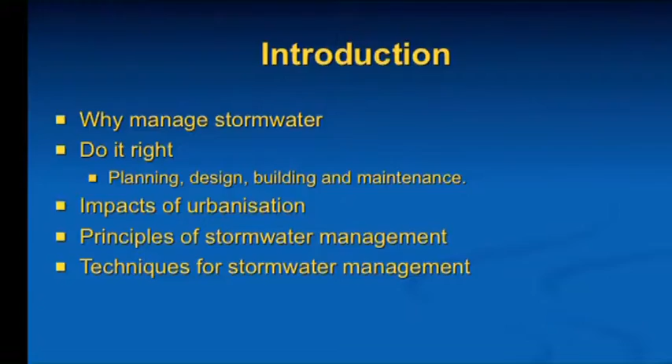Why we might want to manage stormwater, very briefly. Then a little bit about doing it right: planning, design, building and maintenance of stormwater drainage systems, stormwater management systems. In order to know what we're trying to achieve, we have to know what problems we're trying to address. So I'll talk a little bit about the impacts of urbanization, and then principles of stormwater management, and finally, what's probably of most interest to everybody, the techniques for managing stormwater. Some of them, not all of them by any means.

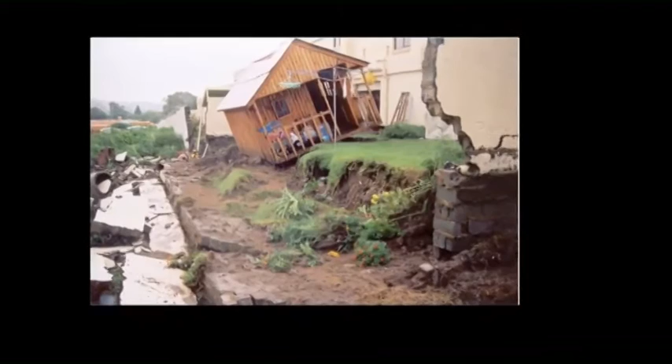All right, why might we want to manage stormwater? The obvious reasons are we want to avoid this sort of situation where the water gets out of hand and washes people's gardens and things away. This is an eroded donga just downstream of Vorna Valley. That's the Vorna Valley Spruit. It used to be a lovely rural catchment of Midrand. It's now an urban catchment of Midrand. Hence, the wetland that was up at this level no longer exists. And that's a bridge in the south of Johannesburg.

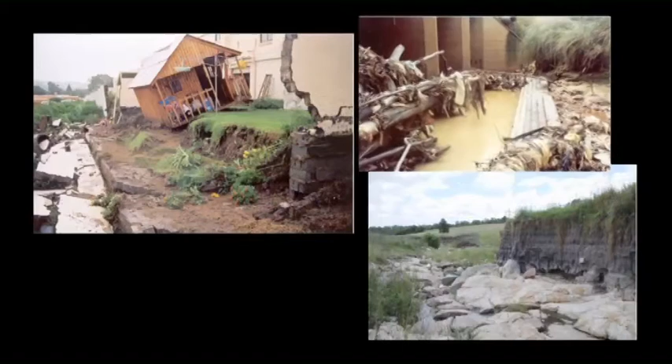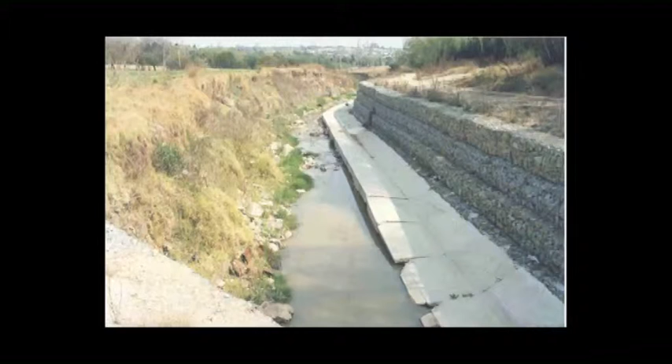Here, somebody's attempt at fixing a donga. What do you do when you have dongas to fix? You stick gabions in them. But in this instance, they stuck gabions down the one side, forgot that rivers erode on both banks, and also tried to go a bit deeper. So we have a gabion wall, a lovely little concrete channel, and the stream flows down the bottom of it. So, how was this fixed?

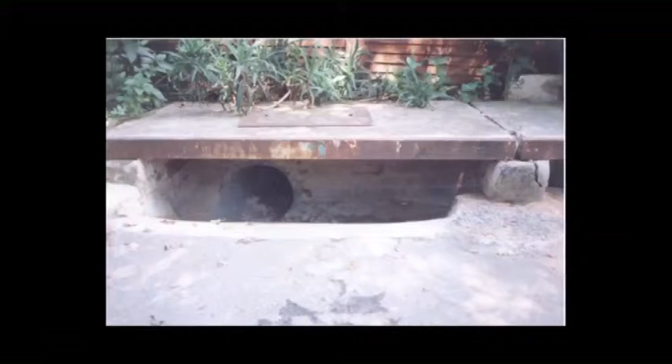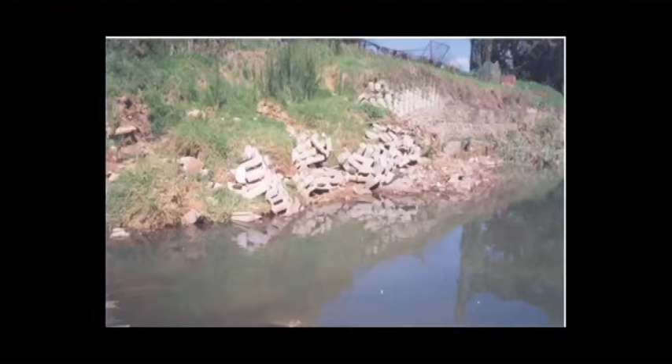And then this is a technical thing. Why do you think the person who designed this fancy outlet with this tiny little pipe at the bottom really and truly believed that it had to have such a big mouth? I'm not sure, but do it right. And if you're going to build it, also build it right and try to make sure that it stays there. You really don't want this to happen. Down on the Braamfontein Spruit below Pirates, that was a Loffelstein wall that didn't have a proper foundation, so the Loffelsteins are now going to Hartbeespoort Dam slowly.

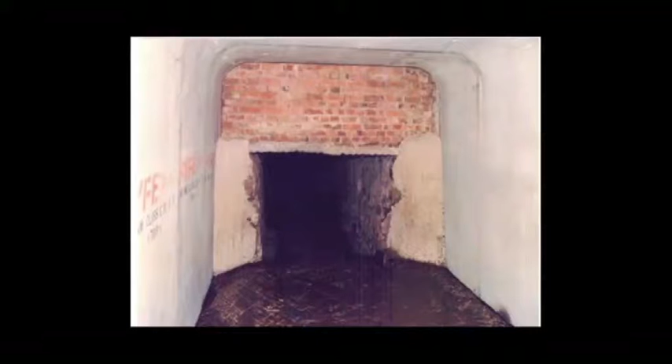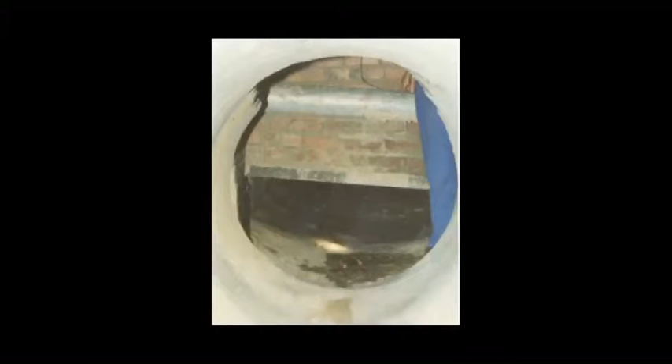This view is looking downstream in a culvert. I'll talk about where you start stormwater management and stormwater drainage facilities, but you don't actually build a great big one and then hope that the water is going to find its way into a little culvert at the bottom. It doesn't work too well. This is looking downstream in a stormwater pipe where somebody got their planning wrong, or maybe they didn't. They just came afterwards and decided they needed an electrical conduit through the stormwater drain. So we have this clean, great stormwater pipe and a box. So that pipe doesn't work too well either.

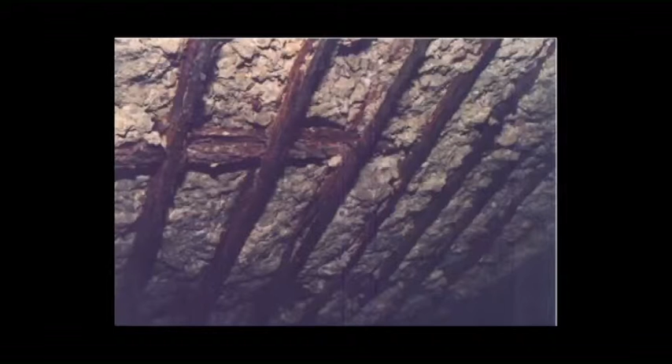If you're going to canalize rivers, you really do need to do something about maintaining them. So scour holes are not great because they end up in bank failure, and that costs maintenance. And this finally, this is quite an interesting problem.

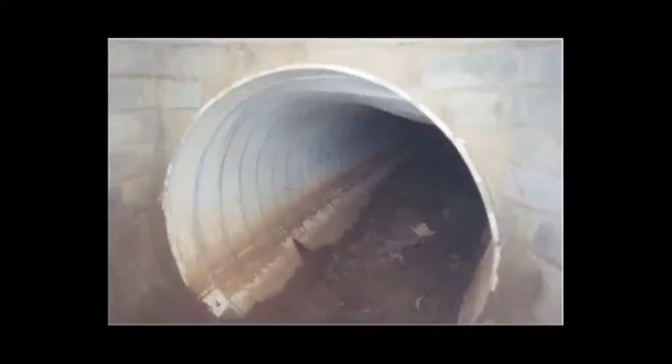That is a thin-walled plastic pipe. It's a structural walled plastic pipe. It comes in a roll, and as you want to make a pipe, you actually roll the thing out and it clips together, the little edge like that, and you end up turning your plastic strip into a pipe. But it's got an effective structural thickness of about 8 millimeters of plastic.

Now, somebody took a 900 pipe and they buried it under 2 meters of soil, and they thought because somebody told them something, it was going to work. When I say do it right, it doesn't only mean build it right. What I mean is also manage it correctly. What happened here, the consulting engineer had designed a concrete pipe.

Concrete pipes are expensive. The contractor went along to the developer and said, I've got a much cheaper plan. I can do it with this cheap plastic pipe. And the developer said, well, if it works, of course, let's do it. So the consulting engineer was overridden. And this plastic pipe, I don't know whether you can see the top there. It's just quietly collapsing into itself.

Consulting engineer was the first line of attack. You let us build this thing. Guys, everybody needs to be sensible about what they're doing. So this kind of mistake can be quite embarrassing. But what are we trying to achieve? We're trying to manage the impacts of urbanization on stormwater, the effects that they have on the catchment.

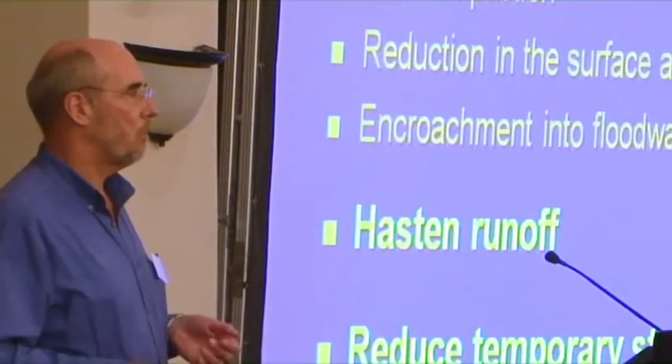So because the system is more efficient, it responds to shorter, more intense storms, and you get this sort of vicious circle. The more intense storms you have to deal with, the more efficient systems you have to build. And so your systems are perpetually becoming undersized. Similarly, then we have to canalize our water courses because we've got increased runoff and the water courses are being damaged. Again, what it does is it makes the system that much more efficient.

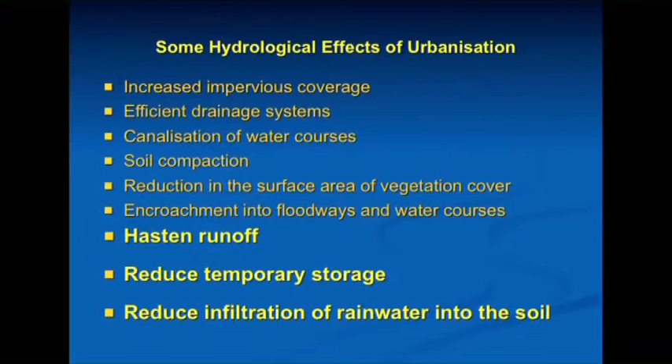And then the hard one, soil compaction. We say, but we've got open spaces, we've got gardens, we've allowed for these median islands in roads. And why aren't they working? Why aren't they absorbing the water? It's actually quite simple. A natural soil is not a homogeneous mass. It's got voids, it's got macropores, which were animal burrows, which were old root channels and things like that.

Not root canals, that's a bit painful.

Yeah. And those soils have an amazing capacity to absorb water. But when we build anything, the first thing we do generally is we go and we clear the site and we compact this, and then we go and plant something afterwards. That changes the structure of the soil and it reduces its permeability by probably a half, probably even more than that. So just providing open spaces within our developments doesn't necessarily mean that the soil has the capacity to absorb the water. You need to help that.

Reduction in the surface area of vegetation cover. Okay, reduction in the surface area of vegetation cover. Leaves take an enormous amount of rainfall to wet them. By taking the vegetation out, you increase the runoff.

Encroachment onto the floodways, of course, we're taking the storage out of the system. What do these all do? They hasten the runoff, they reduce temporary storage and they reduce the infiltration into the soil.

And then some quality effects of the urbanization. We increase the point and diffuse pollution sources. The failure of the wastewater drainage systems, we've all seen it. We've all seen the popped sewers all over the place. Poor and non-existent sanitary facilities.

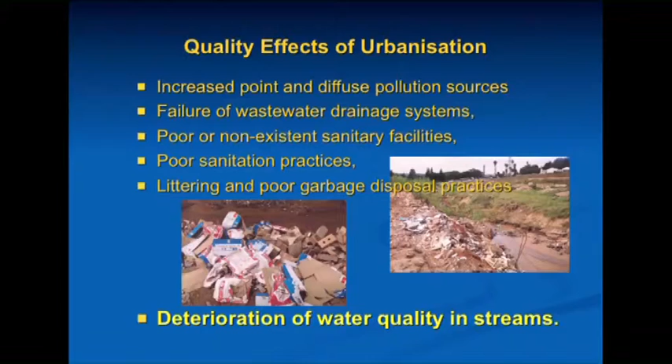Probably the grossest thing that I've seen in a long time is the sanitation system in Khayelitsha. They tried to build a vacuum sewer system, but for whatever reasons, it doesn't work. So the sanitation system there consists of paint tins and Checkers bags, plastic bags. In each one of the little shacks is a paint tin and a Checkers bag that gets used for the night. In the morning, the bag gets tied up and it gets tossed out with the garbage next to the skips. And of course, it gets picked up by the stormwater drainage and down it goes into the rivers.

Impacts of this: increased frequency of runoff. Why is frequency of runoff an issue? We know that we can have wetlands sitting on very steep slopes in rural catchments, 3%, 5%. I've seen wetlands sitting on a 10% or more slope on the side of the hill in Natal. The reason that they can exist is because surface runoff over those areas occurs very seldom, maybe once a year, maybe once in every couple of years. In between those events, the vegetation has time to reestablish. It might be damaged, there might be a bit of erosion, but in a year or two, the vegetation is reestablished.

What do we have when we have impervious surfaces and it rains? 2 millimeters of rain is all it takes to start runoff from a road. So every single time it rains, boom, the river gets hit. Hydrograph comes down, the vegetation hasn't a hope. So increased frequency of runoff is probably one of the worst, most insidious causes of damage in urban drainage systems.

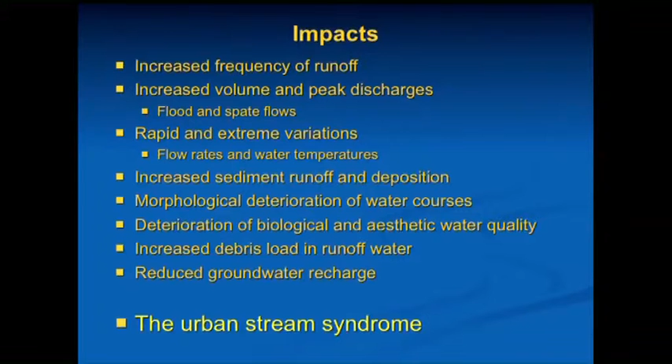Increased peak flood and increased volumes speak for themselves. Rapid and extreme variations have huge impact on the ecology of systems. Temperature variations in salmonid streams in particular, that's where it's been researched, but I'm sure we'll see temperature variations if our fish populations are ever researched. Increased sediment runoff and deposition. We heard yesterday that sediment runoff from construction sites is about 100 to 500 times more than from natural catchments. Deterioration of the biological and aesthetic quality of water, increased debris load in runoff water. We see that, and I showed you a picture of that. And of course, the reduction in groundwater recharge.

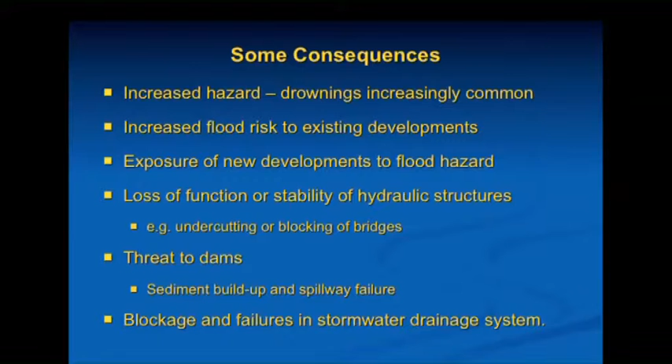All right, some consequences that we feel in society. There's an increased hazard. Every summer we hear of people who drown, mainly because of a lack of appreciation of the power of the water, a lack of appreciation of how quickly the water level can rise in a river. Increased flood hazards, exposure of new developments to flood hazard, loss of function and stability of hydraulic structures, threat to dams, blockage and failures, all of those things speak for themselves, so we won't go into them.

More consequences though. Loss of the recreational amenity of watercourses. People are not really interested in dangling their feet over the edge of a 3-meter high vertical sided donga, so they write them off. We see increased public health risks. Even where we create water bodies, people will come into contact with that water, and you can't really stop them. If you create a water body, somebody's going to swim in it. This is an urban lake in Soweto. I hate to think what's in that water, but the kids are quite happy playing in there. If we're going to create water bodies that people have access to, we have an obligation to make sure those people are safe in them.

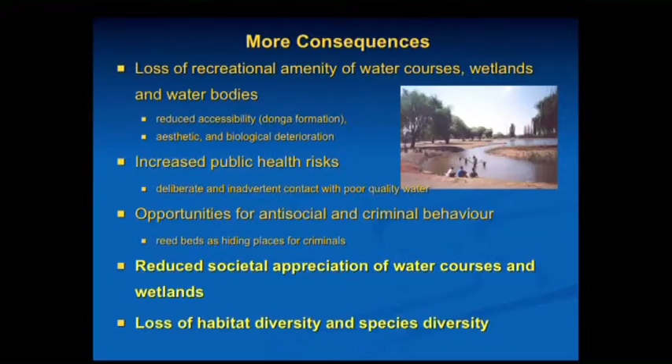And the result of that, of course, people lose an appreciation of the watercourses and water bodies, and if they lose an appreciation, they're no longer interested in maintaining them, and again, we have this vicious circle. If you can't maintain a stream that works, then why should we be interested in it? And if we're not interested in it, why should we pay you to try to maintain the stream in a state that works?

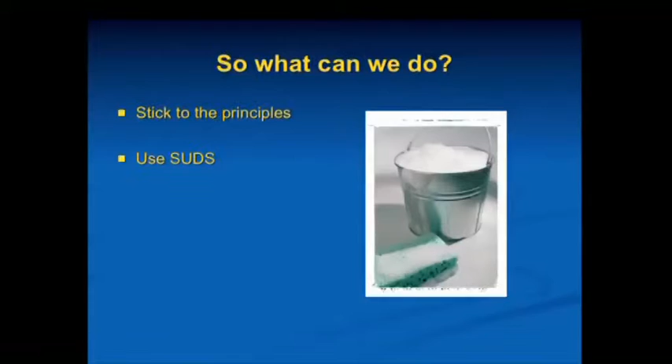So what do we do? We use SuDS, and we stick to the principles. I'd like to go through these quite quickly because some of them are quite important. Understand that drainage is a regional phenomenon. It doesn't respect political boundaries. It doesn't respect property boundaries. The only thing that water knows about is running downhill. Right?

Every urban drainage area has two systems, whether they were designed or not. We have a pipe system or some sort of little stormwater management system, and then we have the floodways. Water will find its way downhill; whether it has to go through somebody's lounge to do it, it will find its way downhill. Runoff routing is a space allocation problem. You need to allocate space to water.

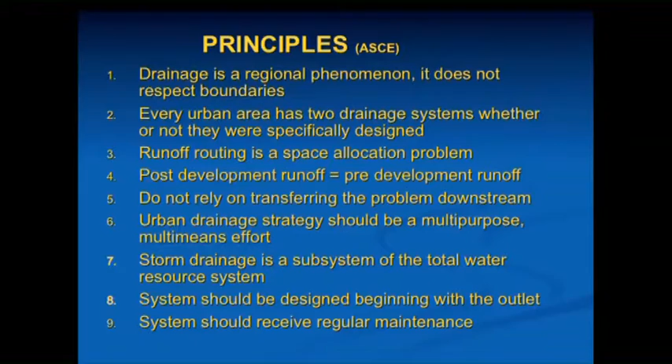Water has a volume. You can't compress it. You can't do anything with it. You've got to let it flow down the hill. Right. And don't rely on transferring the problem downstream. It was the old engineering way of doing things. Put it in a pipe, get it to the river as fast as possible. It'll go away. So what do we do?

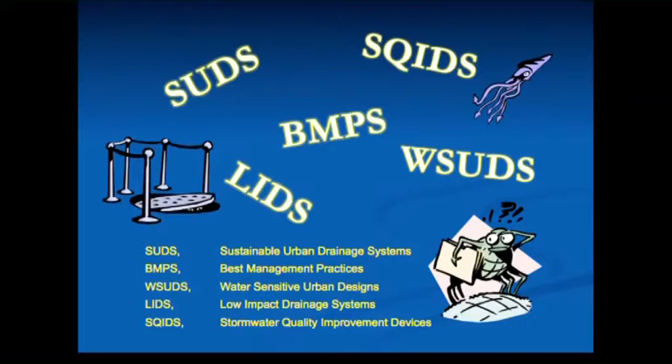So what is the purpose of a SQID? Really, all we're trying to do is recreate the natural processes. Infiltration: we're trying to give the water opportunities to infiltrate into the soil, and that reduces the volume of runoff, and it reduces the peak discharges as well. We're trying to give the water opportunities to evaporate, so we're trying to recreate evapotranspiration areas, planted areas and things. We want to store the water, so we create storage, detention facilities, retention facilities, and that reduces the peak discharge. It can, in certain instances, reduce the volume of runoff as well.

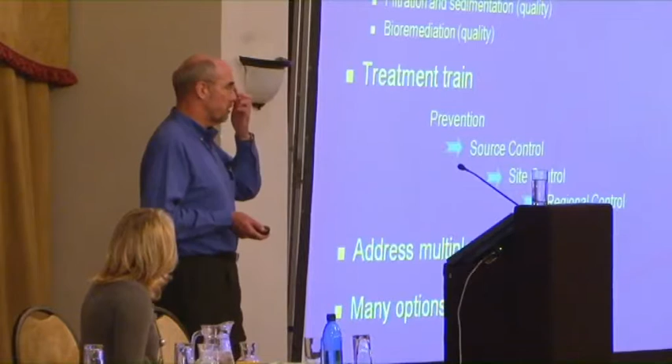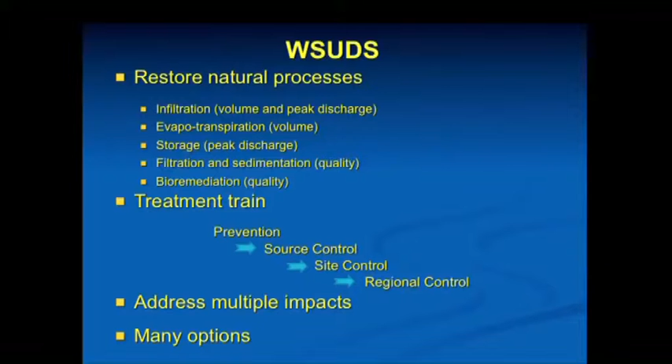We're looking to improve the water quality. So we want to trap some of the sediment. We might want to filter out some of the finer material as well, and we want to expose the water to bacterial activity and plant activity to take out some of the nutrients and possibly some of the heavy metals as well. So we have bioremediation facilities, and they work as a treatment train.

First of all, let's try to prevent the runoff. So let's try to reduce soil compaction in our open areas, and let's try to have as many open areas disconnected from the drainage system as possible. That prevents runoff. Then source control. Let's try to store the water on the roofs of buildings if at all possible. The roof of a building is an amazing storage opportunity.

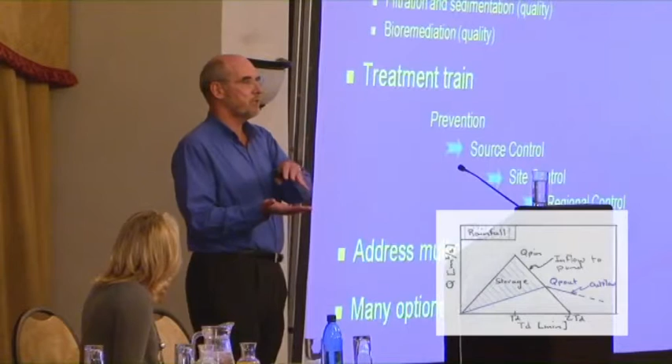I told you I've got another number for you. The normal structural design load for an accessible roof is 2 kilonewtons per square meter, which corresponds to 0.2 of a meter of water. The 24-hour, 50-year rainfall over most of this country is 0.15 of a meter of water. So if you store the water on the roof of your building, you can store the whole rainfall for 24 hours that would occur once in 50 years. We ignore that, but it's there.

If we can't control the runoff at source, we try to control the runoff on the site. And if we can't control it on the site, then some cities maybe have regional stormwater runoff control facilities. The idea is to address multiple impacts in a single facility. So if you can address quality, runoff volume, and peak flow all in the same facility, that's great. And of course, there are very many options, ways of doing this.

Stick to the standards first and foremost. There are standards for stormwater management, and you need to stick to those. Engineers will tell you you can't move away. We've all heard that. Engineers are the boogie people. First of all, the safety standard.

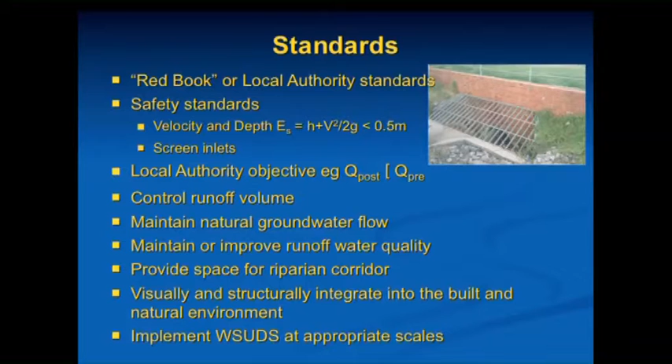Be aware of the power of flowing water. Water flowing at 3 meters a second, now that's fast, it's sort of a jogging pace, has a wave height of 0.5 meter. So if you have a stream of water which is flowing ankle deep, and it can easily be flowing at ankle deep, and it's flowing at 3 meters a second, when you step in it, the wave hits you on your hip. And if it hits you on your hip, you're probably going to roll over, fall over, and then you will roll down the water course.

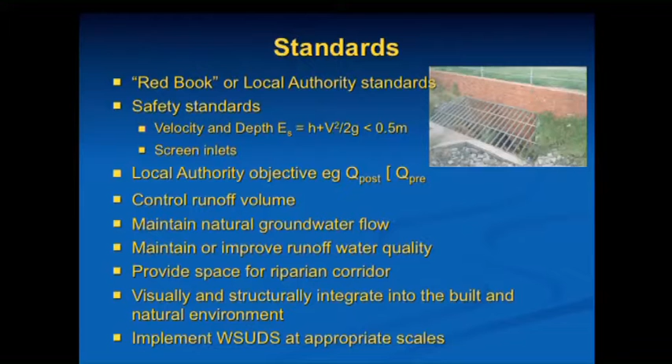Other standards, local authority objectives, try to keep the post-development peak discharge equal to the pre-development peak discharge. That's what the city of Johannesburg's standard is. The city of Cape Town is going a step further and saying, not only do we keep the peak discharge the same, but we also try to keep the post-development quality the same as the pre-development quality. Storage: Q in is equal to Q out plus change of storage. That's the equation I was going to give you.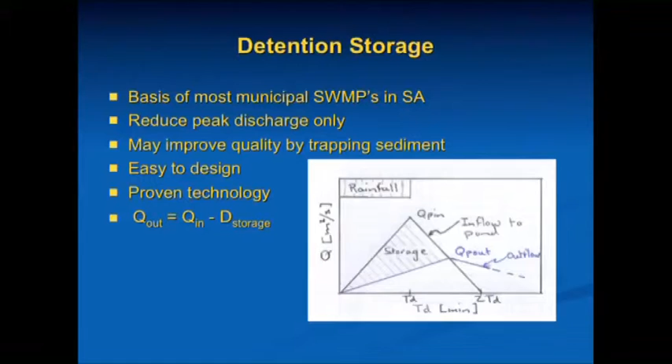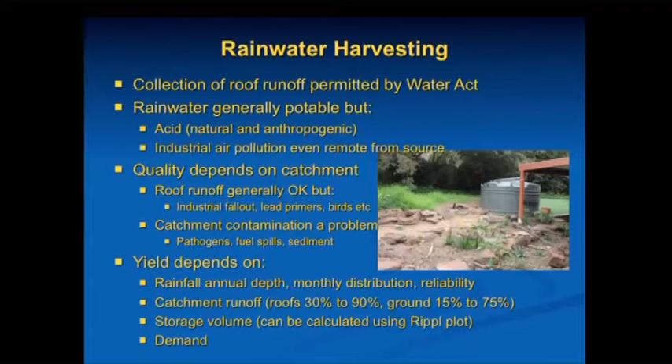Rainwater harvesting. You can harvest rainwater very successfully. You're entitled to harvest rainwater according to the Water Act. It specifically says you can, right? Be careful of it. The quality of rainwater is generally quite good. It's a little bit acid because it's in equilibrium with the carbon dioxide, but it's not too severe. Be careful if you're retrofitting old buildings, because they used to use a lead primer on the galvanized roofs. You don't really want to feed too many kids lead. It's bad for their brains. Okay. The yield, you can go into this.

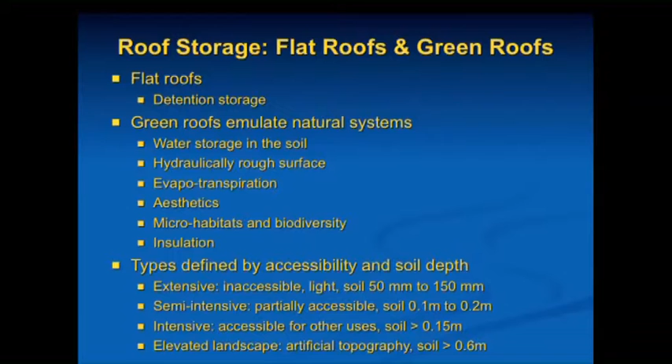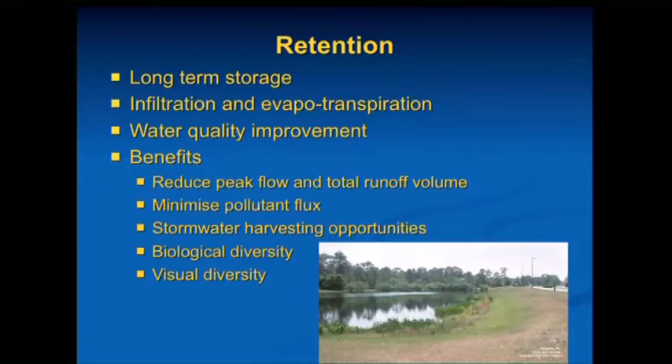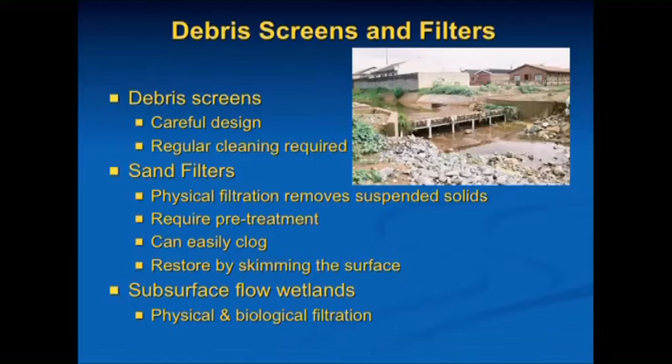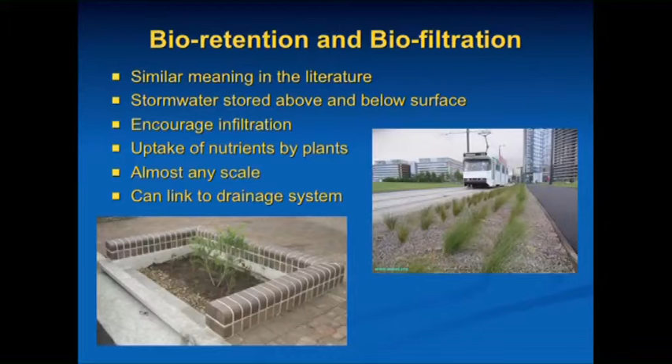Debris screen. Okay, sorry guys. I just wanted to tell you about this opportunity very quickly. Instead of having a curb inlet which goes straight into a pipe, build a curb inlet that goes into a tree bowl. Put some stones in the top 300 millimeters of your tree bowl, and then take the excess water into the pipe. The first couple of millimeters of water will go to irrigating your tree. You'll get benefits in biofiltration, bioretention in the tree bowl. It works very well, and it can work as urban furniture as well.

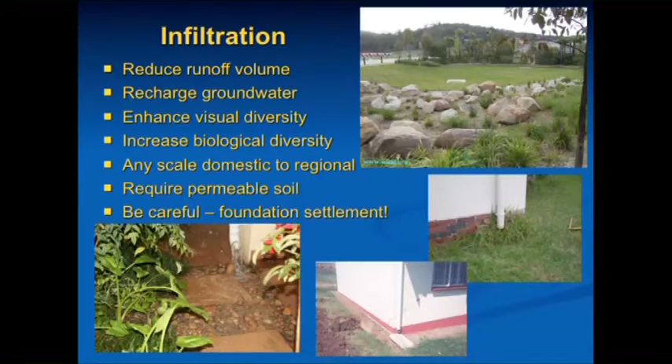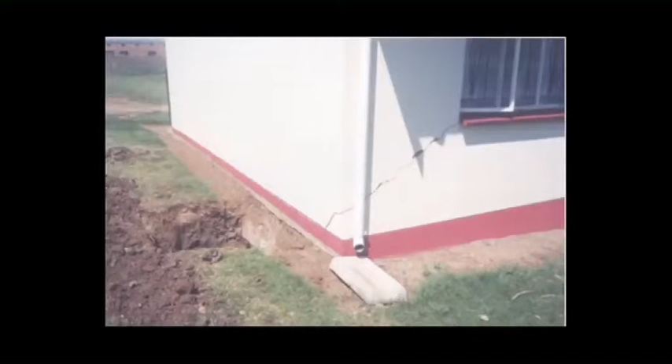Infiltration, at whatever scale you like. That's a regional infiltration point in Australia. This is the bottom of Neil Armitage's garden. This is my own garden with a little infiltration facility next to the front door. And this is what happens if you try to infiltrate stormwater next to a foundation on collapsing soils. You break your house. So you can't use the same system for each thing. There's no panacea. You've got to choose what's appropriate for the site.